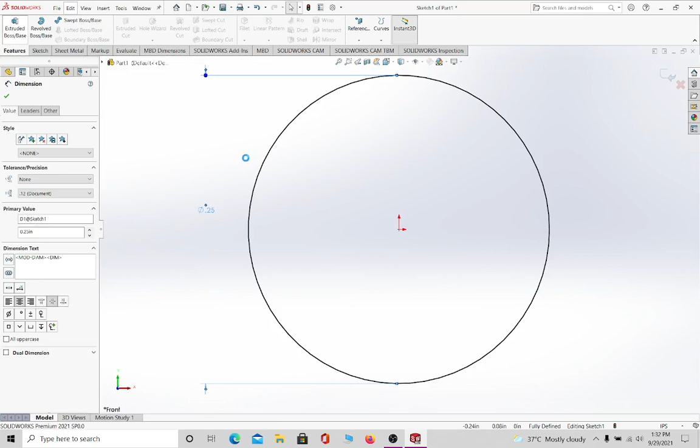0.25. Okay, then what I have to do, I have to extrude it about 0.875 inches. Okay, now what you have to do, you have to select this plane and sketch, make a circle of a diameter about of major diameter. What is major diameter? Major diameter is 0.375 inches. Okay, now what you have to do, you have to extrude it.

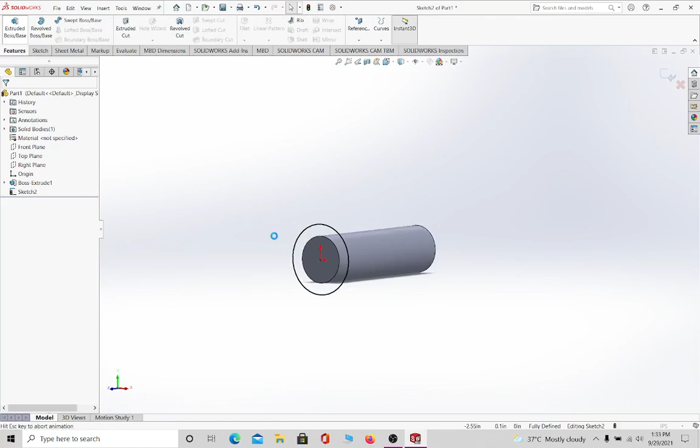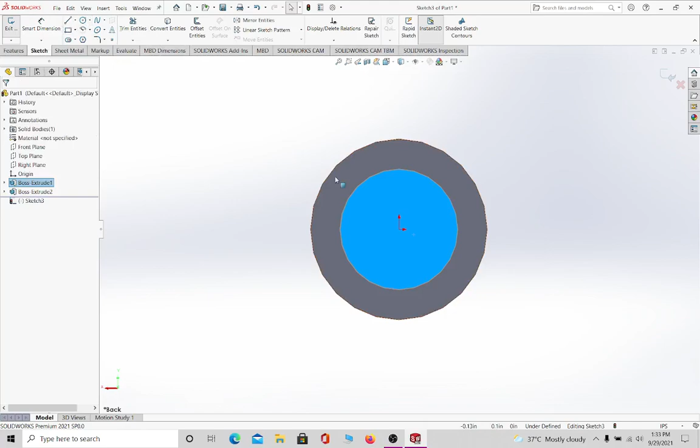Go features, extrude boss base, and extrude up to 3.75 inches. Okay, now comes the main part about the threading. So first of all, for the helix, you have to select this plane, sketch, go for circle, and not go for circle, pick up this thing, convert entities, exit, go for curves, go for helix, and this sketch has been selected.

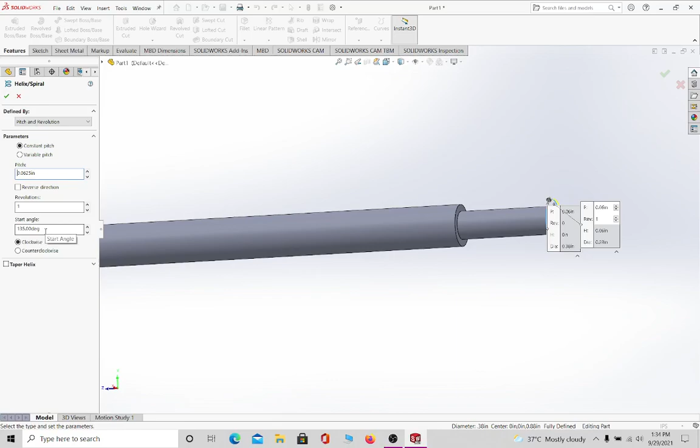So what you have to do, you have to put the pitch. What is the pitch? The pitch is 1/16 of an inch, 1/16. And what are the revolutions? You have to set the revolutions by yourselves. Anything else? No. So you have to set the revolutions. I'm setting about 62 revolutions, and in the reverse direction. Okay, I think these revolutions are not quite enough, so I'm setting about 75 revolutions.

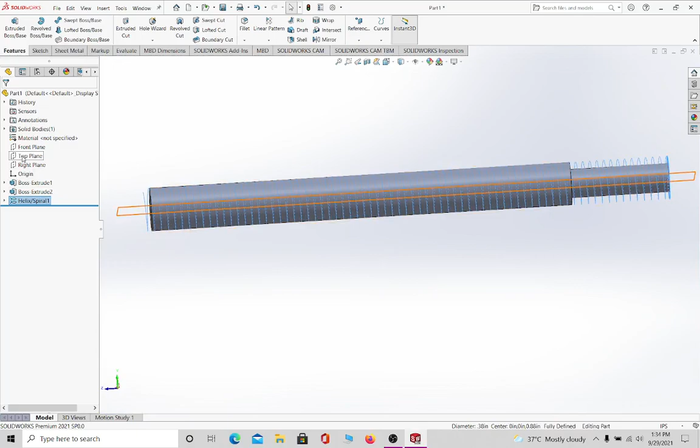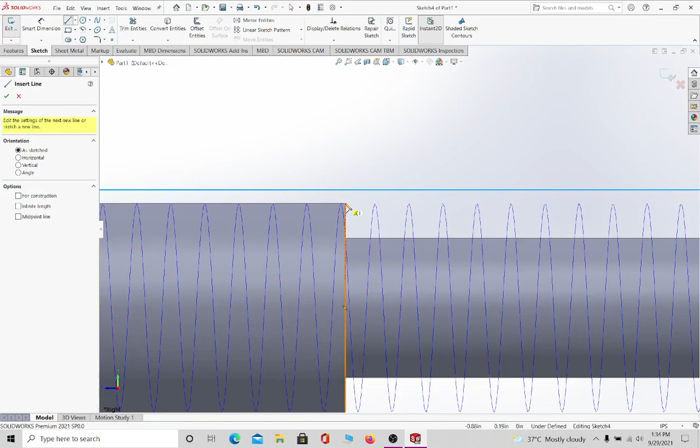Okay, just do it. Now you have to select a plane which is perpendicular so that you can make a profile. Okay, so go over here, and now we are heading towards the profile. So basically, if you see the profile, you will make it in the opposite direction, but you don't have to do that. You have to do just like I am doing right now in front of you. Okay, so first of all, you have to pick this point, make a line like this.

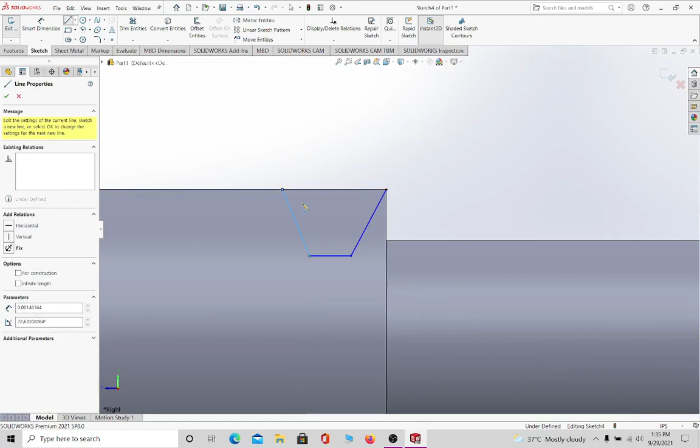Okay, this is a problem. So what you have to do, go for this and just turn it off. Okay, now it will not hurdle you. Make a profile like this. First of all, you have to make a rough sketch, then after that you will dimension it. Okay, so also make a center line which will pass through the origin like this.

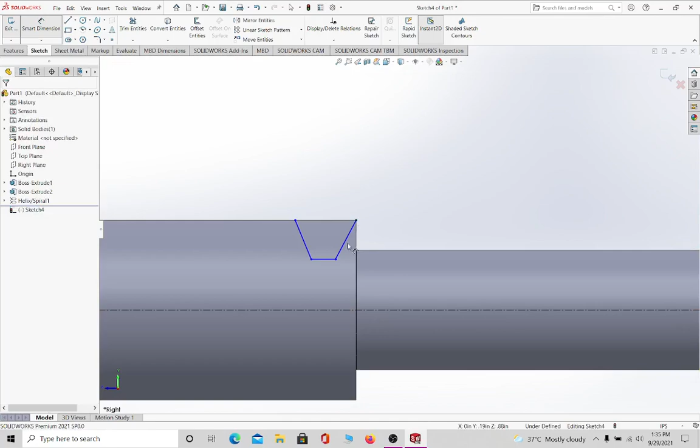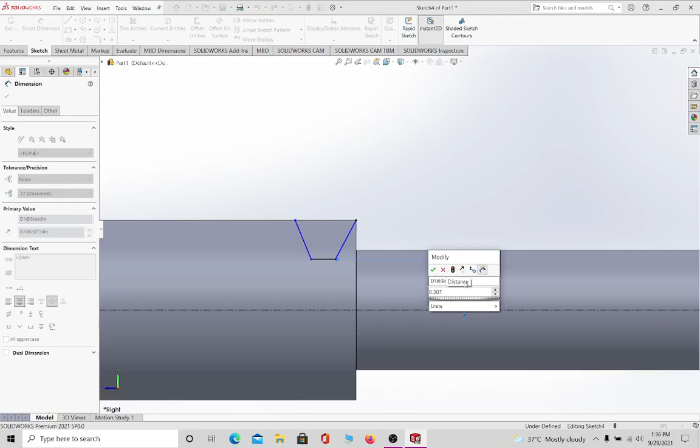Okay, now you have to dimension it. No, I think we have not completed the profile right now. Oh yes, we have to dimension it only. So first of all, dimension it, not this thing, but dimension this thing. So what will this be equal to? This will be equal to the minor diameter. But as we have taken the center line, we will put the radius. So what is the radius? Radius will be divided by 2. So the minor dia or D1 is 0.307342 divided by 2. Okay.

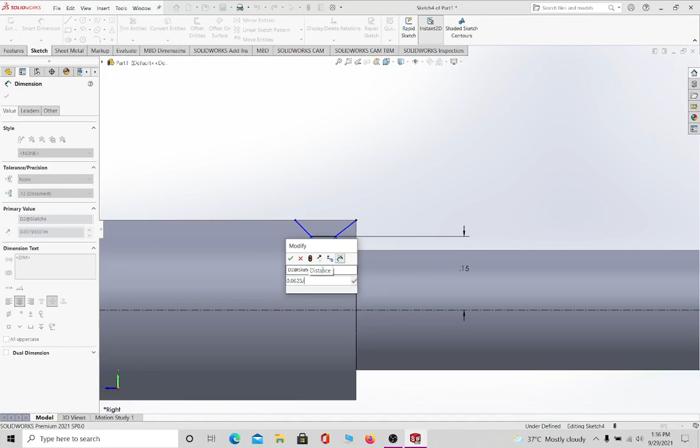Now, what is this length? This length is P by 4. P by 4. What is the pitch? Pitch is 0.0625 divided by 4. Okay. Now you have to take the angle. How are you gonna do that? First select this, and now select this, and give it. So if you can see, the angle is about 60 degrees.

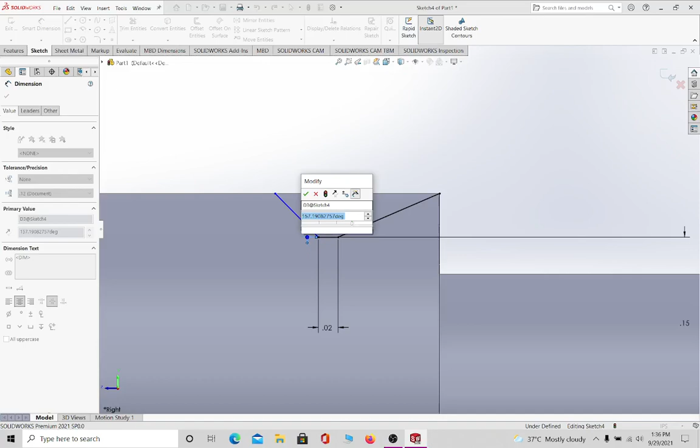If you can see that this angle is more than 90, so what you have to do, you have to put 180 minus 60. Done. Okay, same goes for the second line as well. 180 minus 60. Okay, I think the dimension, everything is fully defined.

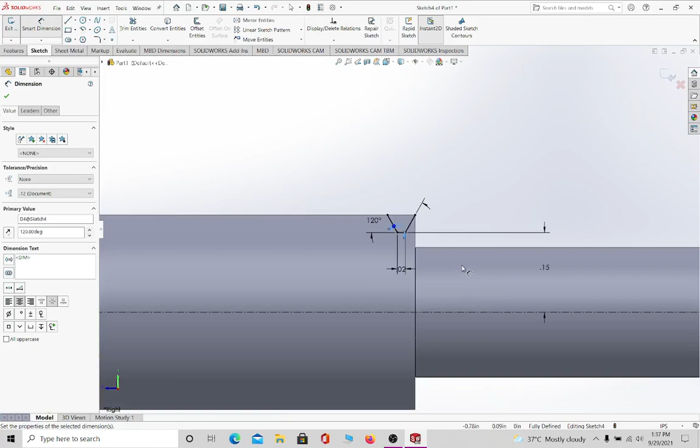It should be. Yes, it is fully defined. So what you have to do, you have to, one thing for sure, you have to complete this sketch. Otherwise, you will not be able to cut it with the swept cut command.

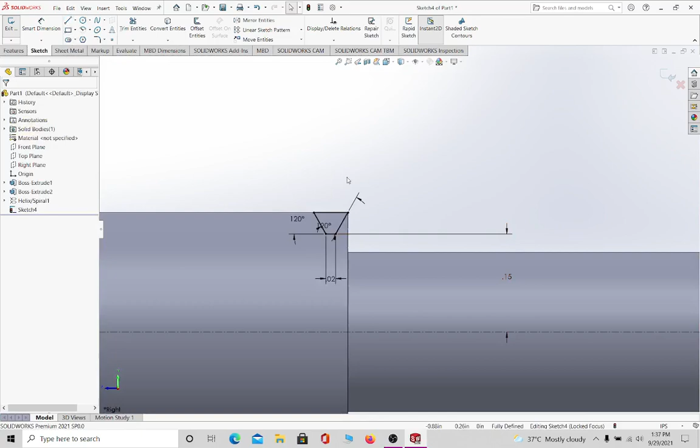You can see that this sketch is in black color, which means that it has been fully defined. You can see over here that it has been written by SolidWorks that it is fully defined. So now you have the sketch, and there is the helix. I can show over here.

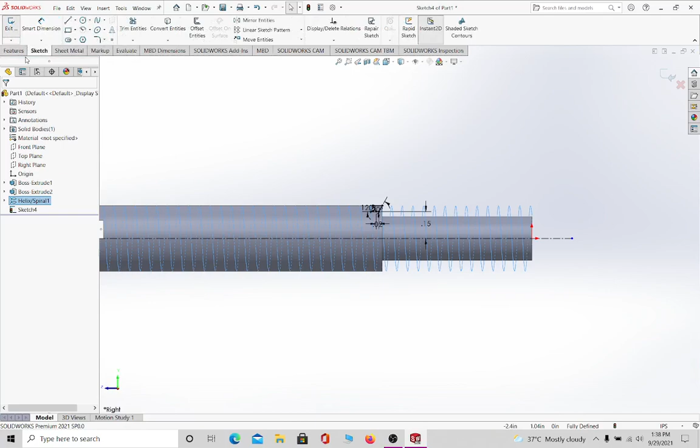Now what you have to do, you have to exit sketch first. Once you exit it, go for features, go for swept cut, and the sketch has already been selected. Now select the helix, and you can see that it is only cutting this side, but we have to cut both sides, so we will select this option.

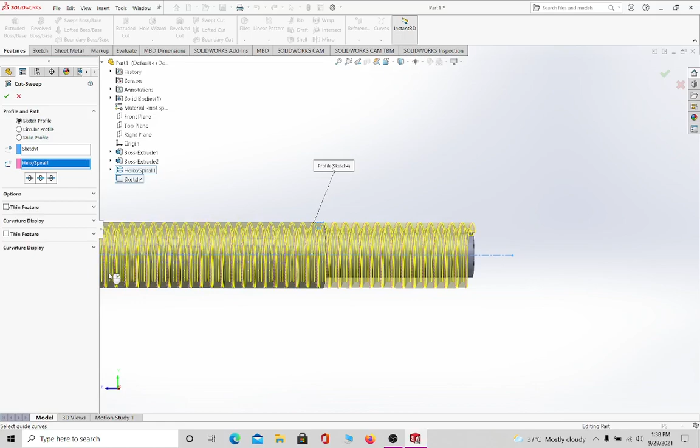It will take a little bit of time for processing, and now my laptop is just hanging a little bit. So you can see that it has covered both sides. If you do this, it will cover only this side. So we have to cut on both sides so that we can get the pretty edge.

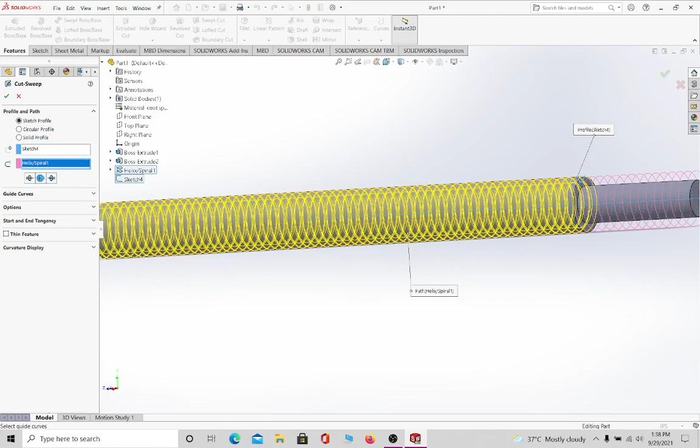So we do this, it will take processing, it will process a big thing. So turn off this.

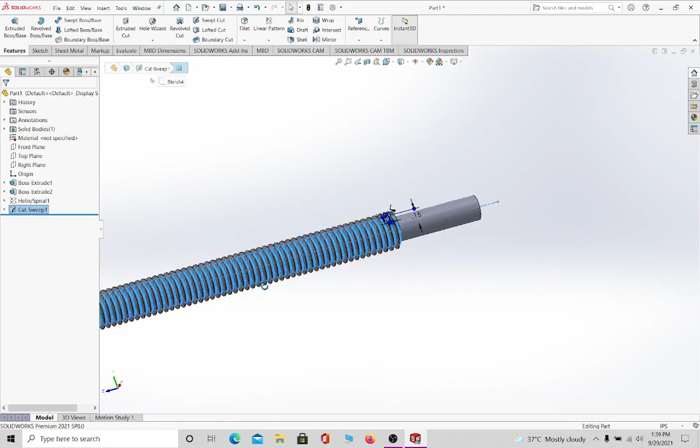You can see this edge, that I want, this edge. This edge will be there over here as well. I can show you. Yes, this edge, if you can see this edge, this one, this beautiful edge.

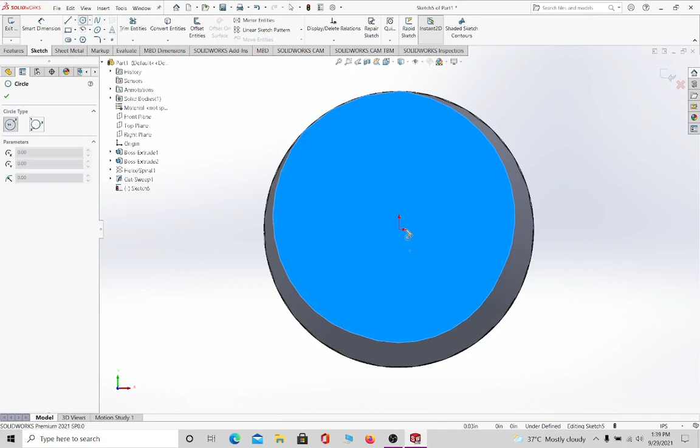Okay, so now what you have to do, you have to make the head. So go over here, sketch, make a circle, and give it the diameter of 0.625.

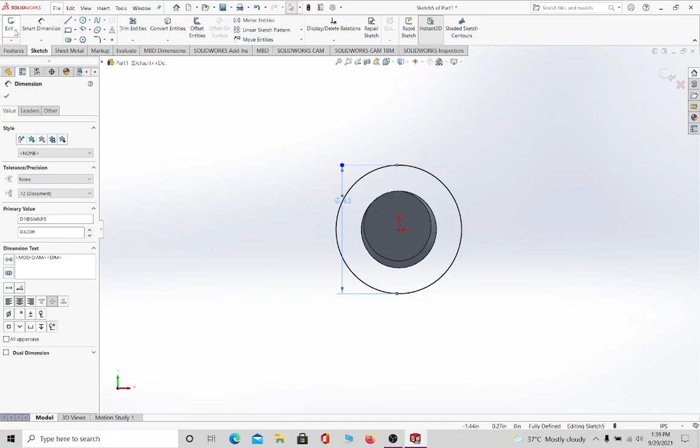Please take care of the diameter, whether it is putting radius or diameter, so both will be different. Now go for features, extrude boss base, and extrude up to 0.438 inches. This is pretty easy.

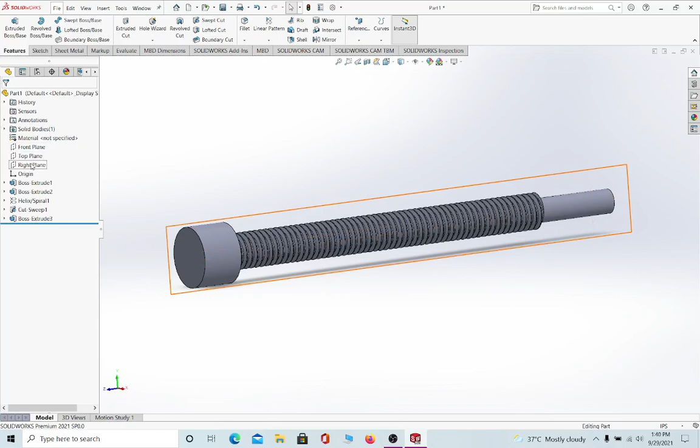Now comes the extrude cut part. So to take a plane, I will take a plane like this. Go for sketch, now make a circle. If you hover over here, you can see the center.

Now give the dimension of the circle as 0.266 inches, and also give the distance from the center 0.219.

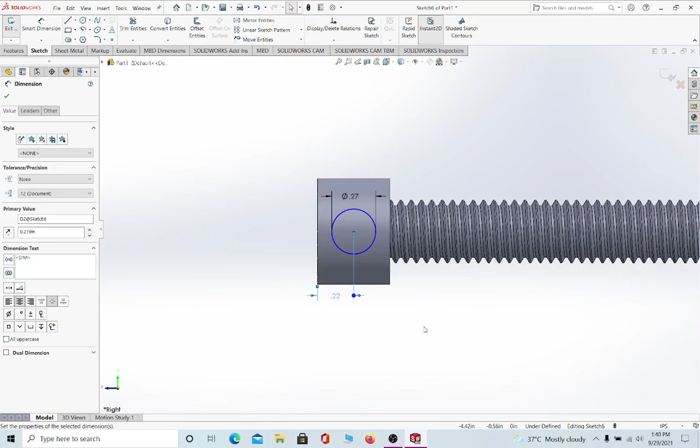And it is not fully defined yet, which is not a good thing. Why has it not been defined? So this thing, take this thing and pick this point, right? If you hover over here, you can find that point. Okay, we can do one thing more as well.

This was the half of the length. So what was the diameter? The diameter was 0.625. So we will dimension it half of it, 0.625 divided by 2. So the sketch is fully defined.

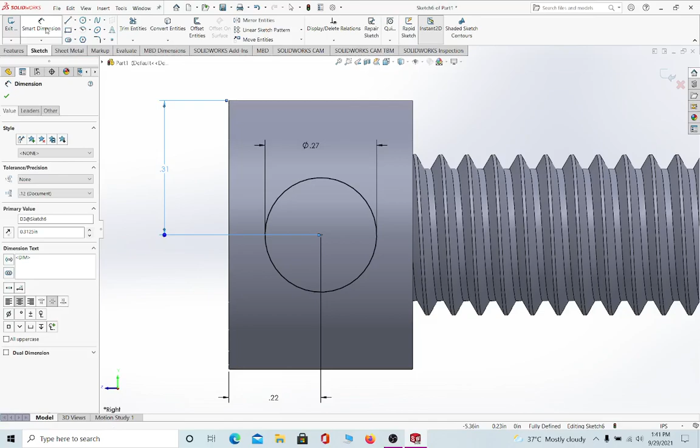Now we will go to features and extrude cut. So go for mid plane, and just make it bigger, so it will cut both sides fully.

Now we have made this screw. You can see. Now you have to color it.

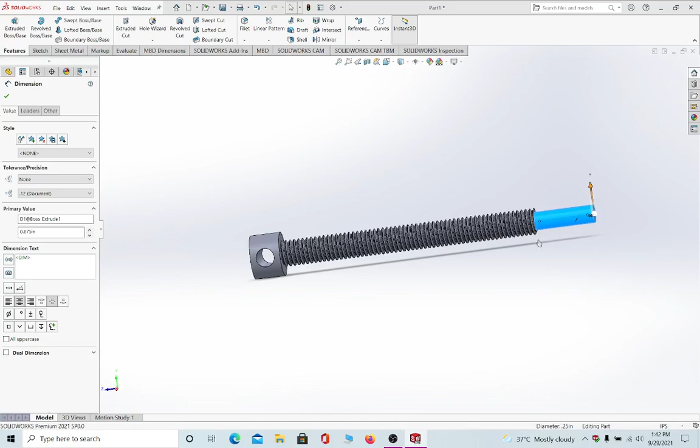For coloring, you have to select this, right click, select body, and after that, pick up the color that you want to have. You can also go for here and go for steel and go for any color like this if you want to.

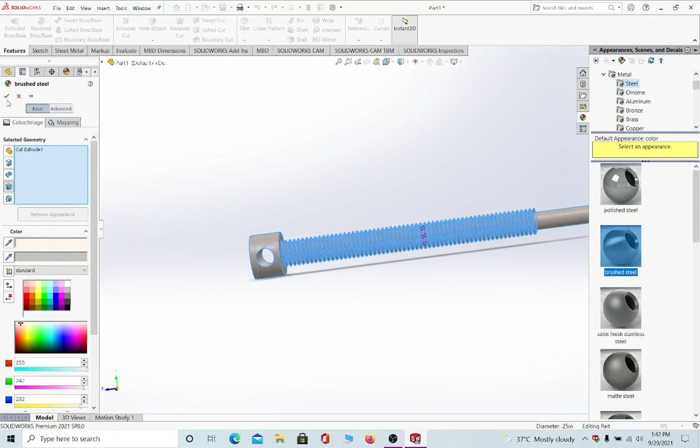It all depends upon you what kind of thing do you want to have. So our screw is ready.